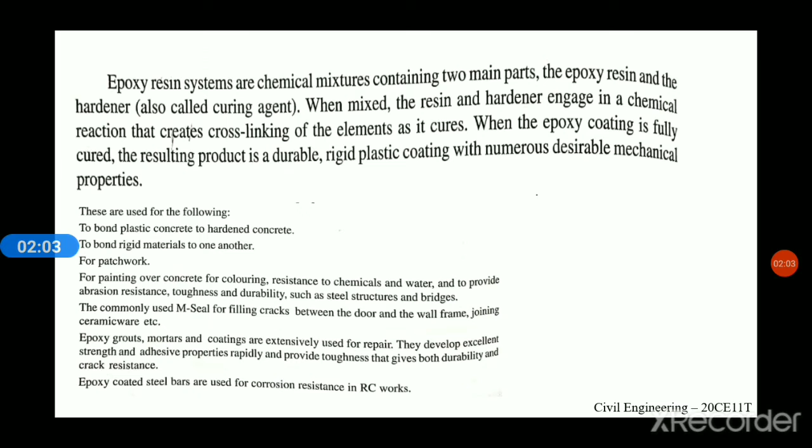So, some of the applications where the epoxy resins are used: they are used to bond plastic concrete to hardened concrete, to bond rigid materials to another. It is also used for patchwork, also used for painting over concrete, for coloring, resistance to chemicals and water, and it will also provide abrasion resistance, give toughness, and provide durability to steel structures and bridges.

So it's commonly used as M-seal for filling cracks between doors and walls, or joining ceramicware. Next, epoxy grouts, mortars and coatings are used for repairs, and also used for corrosion resistance in RC works.

Okay, I repeat, it is a chemical mixture containing epoxy resin and the hardener. When it is mixed, the resin and hardener engage in the chemical reaction, so that will create the cross-linking of the elements. So when it is fully cured, the resulting product will be a durable, rigid plastic with desirable mechanical properties.

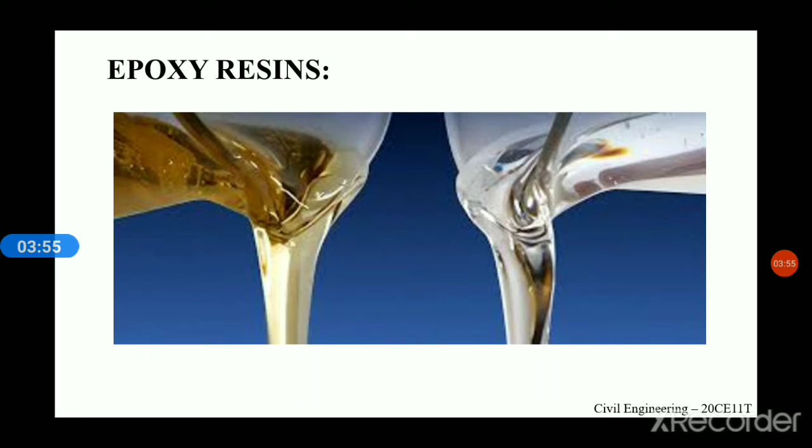So these are the applications where epoxy resin is used: for patchwork, for painting over concrete, for coloring. It is used as M-seal for filling, just now I told in the previous slide. Epoxy coated steel bars for corrosion resistance in RC work, to fill cracks, to bond tiles, used as plumbing sealant, etc.

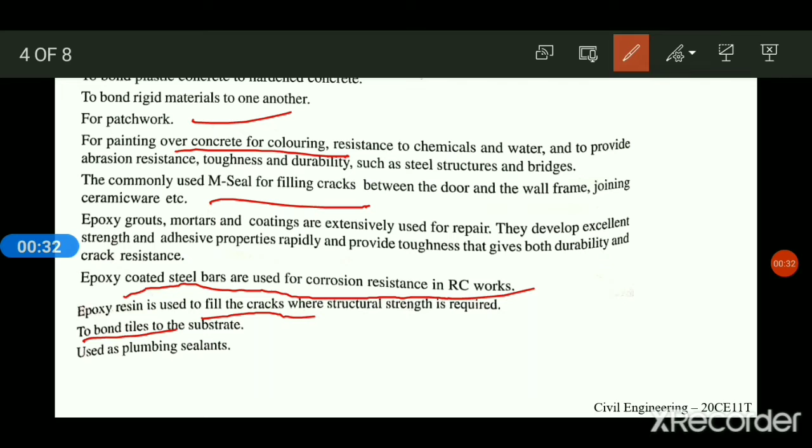So next we have non-shrink grout. So non-shrinkage grouting material is made up of high strength material as aggregate and cement as the base material, supplemented by high fluidity, micro expansion, anti-segregation, and other substances, formulated without iron and chlorine salt. So this slurry can be self-flowing, and the grouting material can automatically infuse narrow gaps under shock-free conditions, adapting to pouring and grouting such as complex structures, dense reinforcement, and narrow spaces.

So it is a hydraulic cement grout. When hardened under the stipulated conditions, it will not shrink, so its final volume will be greater than or equal to the original installed volume. So it is often used as a transfer medium between load bearing members, and often sets rapidly. It is a pre-mixed product that needs only to be mixed with water, which includes ingredients against cement stone shrinkage.

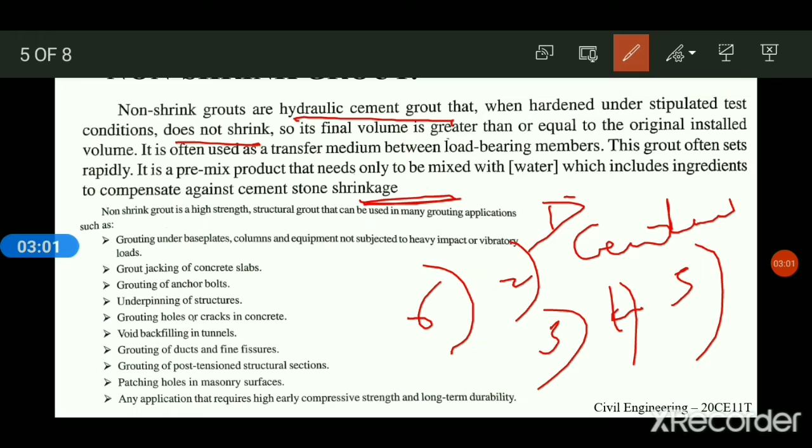The composition of grouting material mainly includes the following components: cementing material, early strength components, water reducing components, thickening and water retention components, aggregates, and finally, intumescent components. So first is cementing material: cement, that is Portland cement, aluminate cement, sulfoaluminate cement, etc. Fly ash, ore powder, microsilica, etc. also come under this cementing material.

So next, early strength components. For this, early strength agents such as sodium sulfate, lithium chloride, and lithium carbonate are used. Next, for water reducing components, naphthalene water reducer, melamine water reducer, polycarboxylic water reducer, and other superplasticizers are used. For thickening and water retention components, low viscosity cellulose ether, redispersible latex powder, etc. are used.

And next, aggregates. I'm talking about the composition of grouting materials, okay, that is cementing materials, early strength components, water reducing components, water retention components. And next, fifth one is aggregate: river sand, mountain sand, machine sand can be used. And last, for intumescent components: gypsum, calcium sulfoaluminate, calcium oxide. So these are the components used for the composition of grouting material.

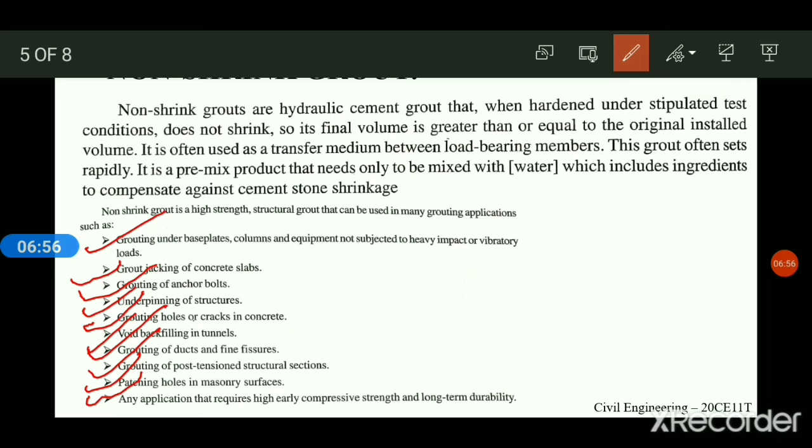So non-shrink grout is a high strength and structural grout. These are the structural grouts that can be used in many grouting applications. Okay.

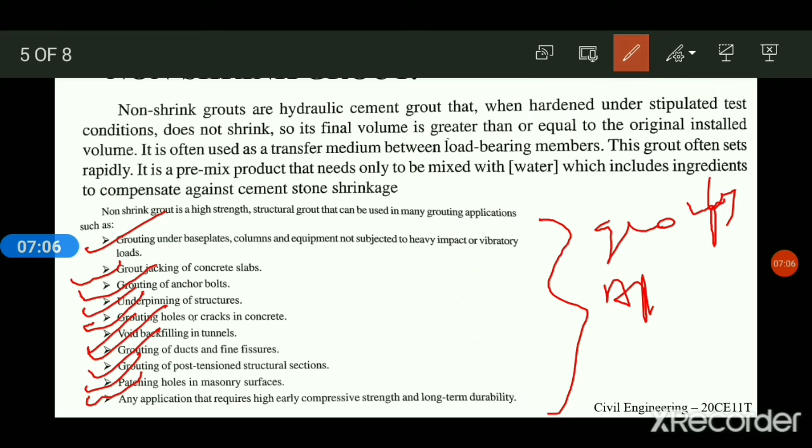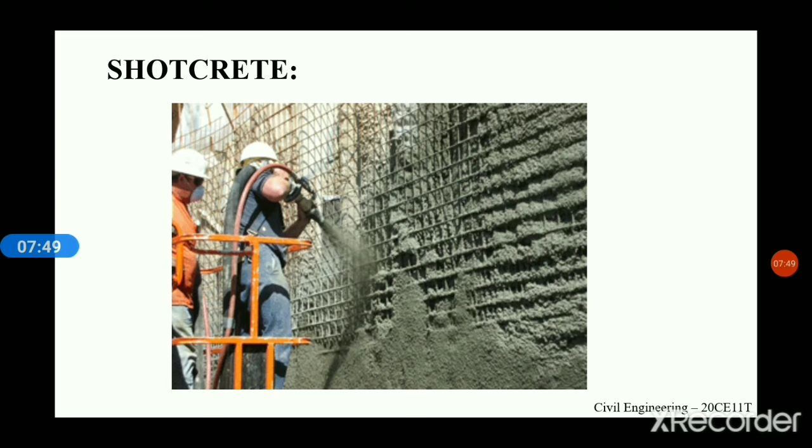So next, coming to shotcrete. What is shotcrete? It is also called gunite. That is because it is a concrete applied by spraying. Therefore, it is called gunite. So shotcrete can be defined as a mixture of cement, aggregates, and water sprayed through a nozzle with a high velocity to produce a compact, dense, and homogeneous mass.

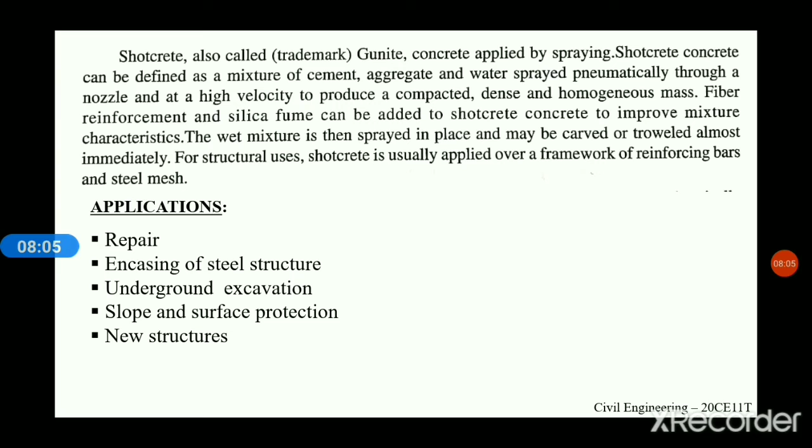So, I repeat, shotcrete can be defined as a mixture of cement, aggregates, and water sprayed through a nozzle with a high velocity to produce a compact, dense, and homogeneous mass. So fiber reinforcement and silica fume can also be added to shotcrete to improve mixture characteristics.

The wet mixture is sprayed in place and may be carved or troweled, and then for structural uses, shotcrete is applied over a framework of reinforcing bars and steel mesh. I will explain the applications where shotcrete is used in detail. So shotcrete also allows you to obtain good compaction without concrete vibration and reduces the amount and time of formwork installation and removal. It has also been used in mining and tunneling for temporary constructions to ensure the workers' safety.

Properly applied shotcrete has been proved a durable construction material characterized by high strength, low absorption, good resistance to weathering, and resistance to some forms of chemical attack. So it is also used in rehabilitation and repairs. Shotcrete gives advantages in situations when formwork is cost prohibitive, where forms can be reduced or completely eliminated.

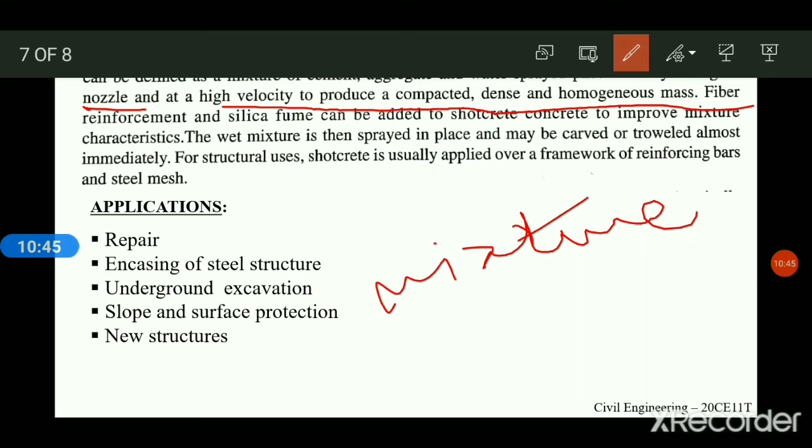So here shotcrete can be applied by two methods: first is dry mix shotcrete, next is wet mix shotcrete. So in dry mix shotcrete, the cementitious material and the aggregates are mixed in dry conditions and delivered to a pneumatic gun. The pneumatically operated gun will ensure a continuous flow of the mix from the nozzle. The interior of the nozzle is fitted with a water ring which injects water to mix uniformly.

So I am talking of the dry mix. So cementitious materials and aggregates are mixed in dry conditions and delivered to the gun. The operated gun will ensure a continuous flow of the mix from the nozzle. Here the interior of the nozzle is fitted with a water ring which injects water to mix uniformly.

So in wet mix shotcrete, the cementitious material, aggregate, and water are mixed thoroughly as we do in conventional concrete. Then the mixture is fed to delivery equipment such as a concrete pump. Then the mixture will be pumped through a nozzle. Additional air is added at the nozzle to increase the nozzle discharge velocity. So that is the difference between dry mix shotcrete and wet mix shotcrete.

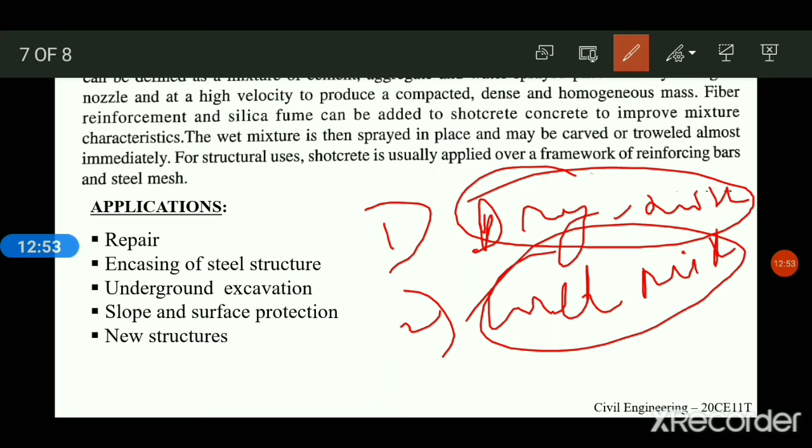So applications of shotcrete: it's used for repair works, can be used to repair the damaged surfaces of concrete, steel, and even wood structures. It can be used for rehabilitation of bridge decks, though it is uneconomical to use shotcrete for full depth repair. It will be useful to use shotcrete for repairing beams with variable depth, columns and abutments. It can also be used for repairing fire and earthquake damaged buildings, and to strengthen and repair deteriorated concrete surfaces. And sometimes it is used in tunneling to line the walls of the tunnel to prevent leaks and fragmentation.

Next application, encasing steel structures. What is it actually? It can be used to encase steel structures for fireproofing. And next, underground excavation. So here shotcrete application in underground excavation ranges from supplementing or replacing support materials such as lagging, sealing rock surfaces, channeling water flow, and permanent lining.

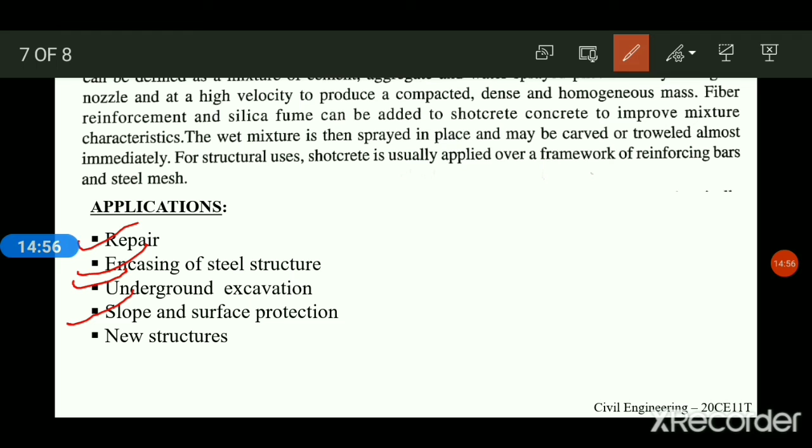So it is used in slope and surface protection, that is, to temporarily protect rocks that will deteriorate when exposed to air. It is often used to cover slopes. Proper drainage should be provided for protected slopes to prevent uplift pressure from damaging the shotcrete. It can also be used for new structures, to construct concrete swimming pools, floors, overhead walls, slabs, columns, and other structural members. Also used for a variety of fancy concrete structures, including artificial rock walls, canopy roofs, refractory linings, canal linings, dams, etc.

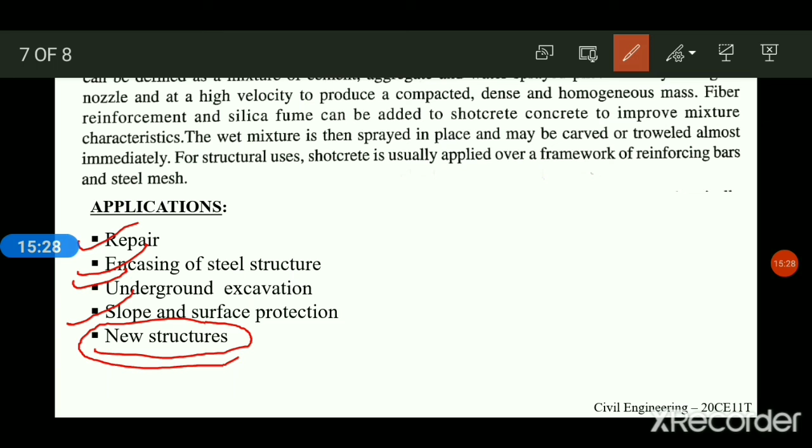So we discussed the applications of epoxy resins and what exactly epoxy resin is, the application of non-shrink grout and what exactly non-shrink grout is, and shotcrete and its applications.